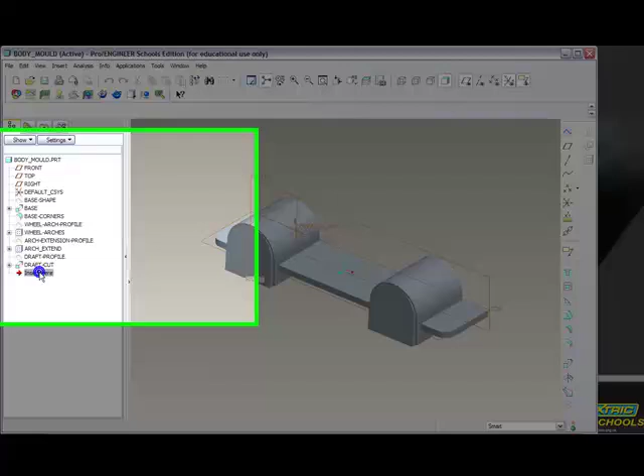Now load up body_mould.prt. Same as in the extrude tutorial, move the Insert Here icon up until it reaches the base corners.

Now we're going to create some new datum planes, so select the Create Datum Plane tool and highlight the back end of the base part. You'll notice we can move this backwards and forwards. Move this into the model by 2 mm and accept.

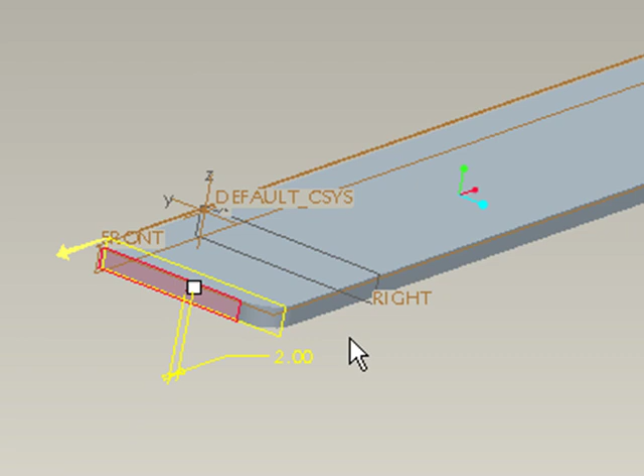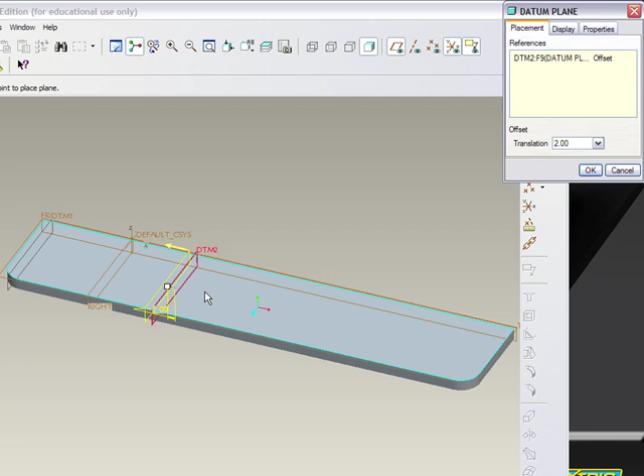Now, without clicking anything else, create a new datum plane and drag this until it reaches 40. Click OK. Now we're going to make another one, drag this by another 40. And one last one - put it on the other end of our base part, inset by another 2 mm.

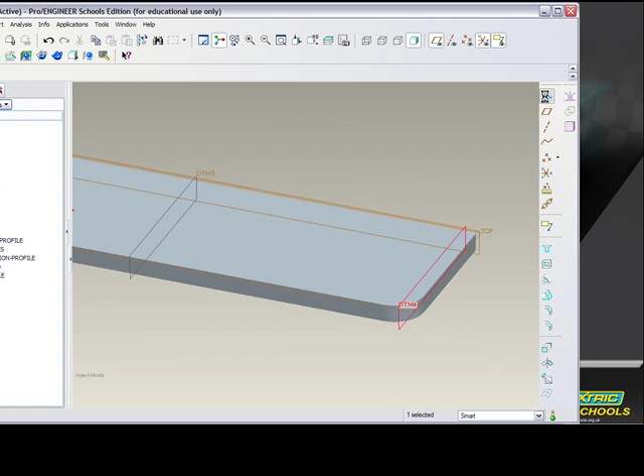Without clicking anything else, hit the sketch button so we can start sketching on the last datum plane we created. Using the line tool, click where I click. Make sure this line is horizontal.

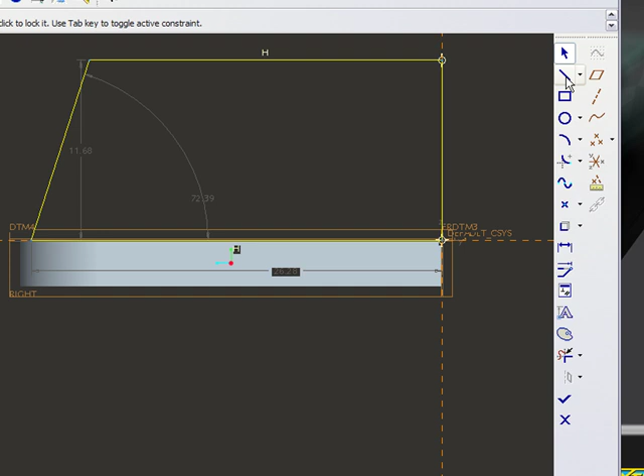Now middle click, hit the selection tool, and now hit the measurement tool. We want to make a measurement from this point here to the edge of our model. Select both of those and then middle click to place the dimension.

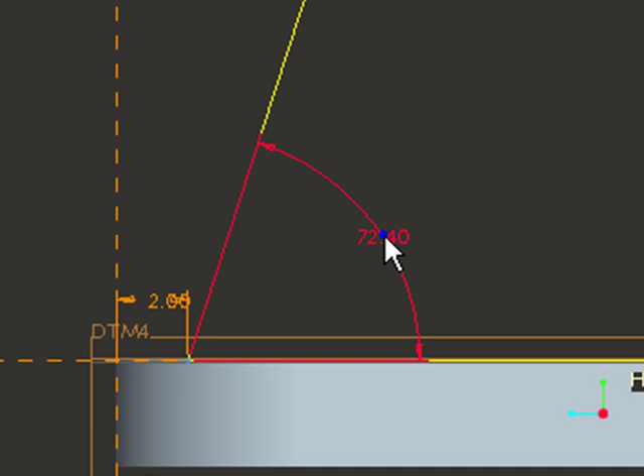Now we want to place a measurement from here and here to create an angle. Hit the selection tool and now we can start editing these measurements. We want this one to be 2 and we want this one to be 80 degrees. Now the last measurement - we want to change this to 20.

Now accept our sketch. Now we're going to make a new sketch on datum plane 3, so highlight datum plane 3, hit sketch,

and sketch again. Now we're going to use a thing called the Use tool, so select it from the tray, select Loop from the dialog box, and now we can pick any edge and it'll copy all the data of the previous sketch that we just drew, except the sketch. Now you should see that the sketch we drew on the first datum plane has been copied onto the new datum plane.

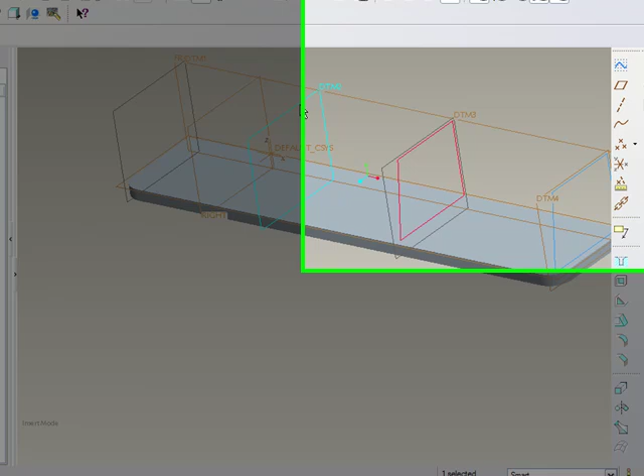Now on datum plane 2, we want to create a new sketch, and using the line tool, again click where I click. Now middle click.

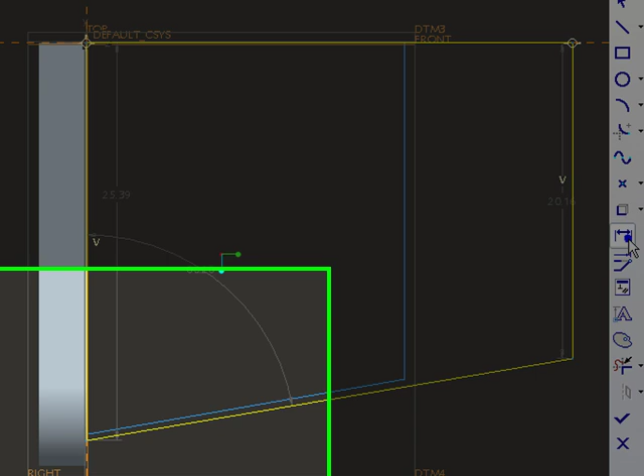Now we want to add our own measurements in, so we'll go to the measurement tool, select this point here, and this line, and middle click, and this line and the base line, and middle click.

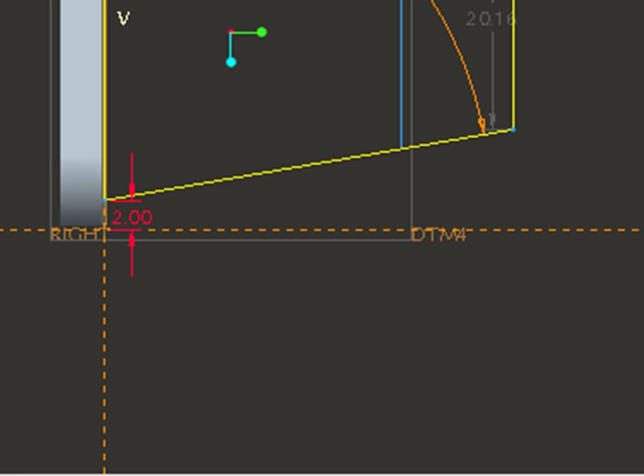Now we want to change these angles to 80, and this measurement to 2 mm. We also just want to create one more dimension along the height of our sketch, and make this 30. Now accept the sketch.

Now we want to copy this sketch again onto the next datum plane. So create a new sketch on datum plane 2. Hit the copy tool again, hit loop, and now select the last drawing that you just sketched and hit accept.

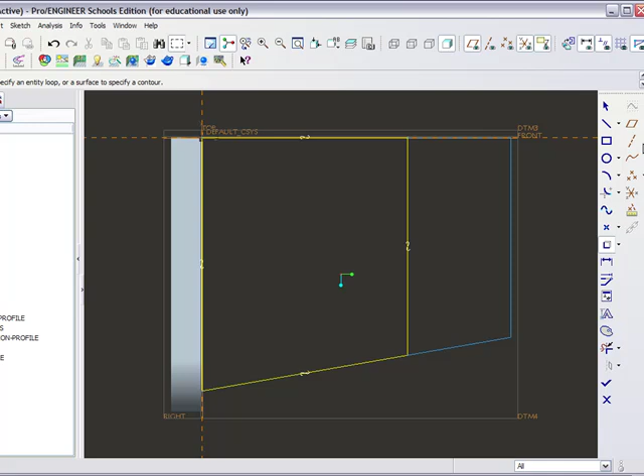Finally, on the last datum plane, we want to create a new sketch and we just want to copy the first 2 sketches again. So hit the copy tool, loop, and then select the line. And hit OK.

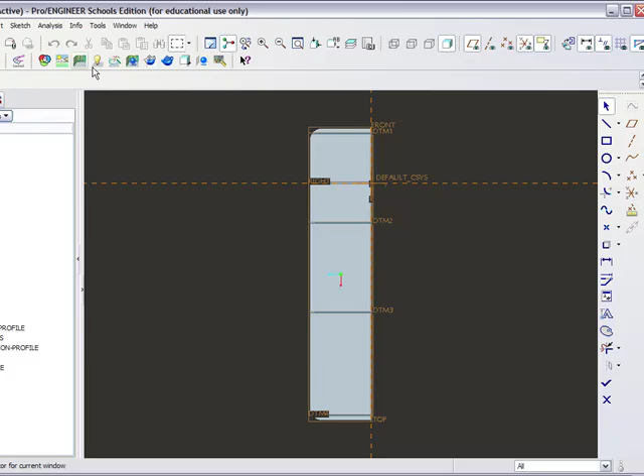Now, to create a swept blend, we need to make a trajectory. To do this, we need to create a sketch on the top of our base part. We need to make some sketch references, so go to Sketch, then References. Let's select these 2 lines, datum plane 1 and datum plane 4, hit the solve button, now hit close.

I want to create a line going from these two datum planes, along the top datum plane as a reference. Middle click, and accept the sketch.

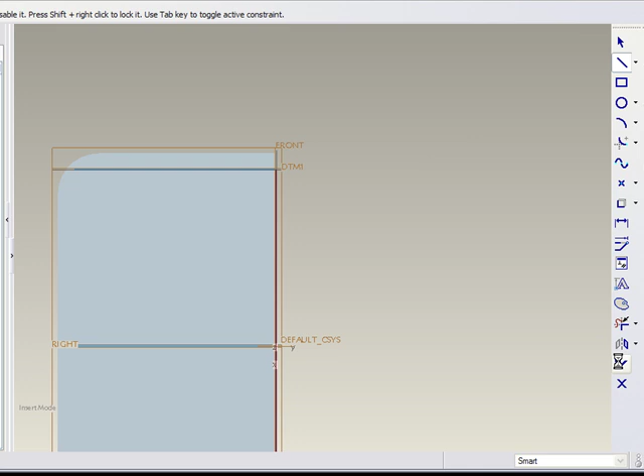Now we want to make our swept blend. So without unselecting the sketch, go to Insert, and then Swept Blend. If you have accidentally unhighlighted the line, just select it again.

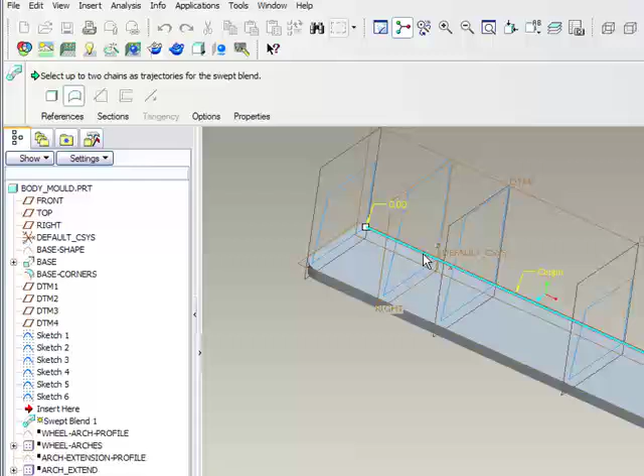Now, we want to go to Sections, we want selected sections, so make sure that's checked, and then select our first sketch. Select Insert, select the second sketch. We want to do this on every single sketch in our swept blend.

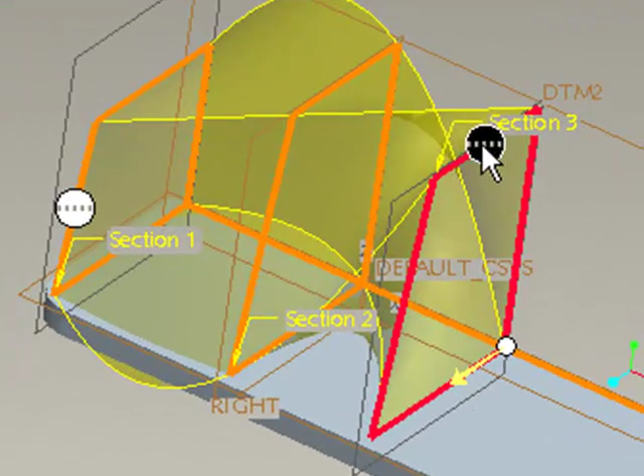What you may notice is that sometimes our swept blend gets confused. All we need to do is tell the swept blend where the start of our sketch is every time. So just drag the handle up to the right hand corner, and the same again for this one.

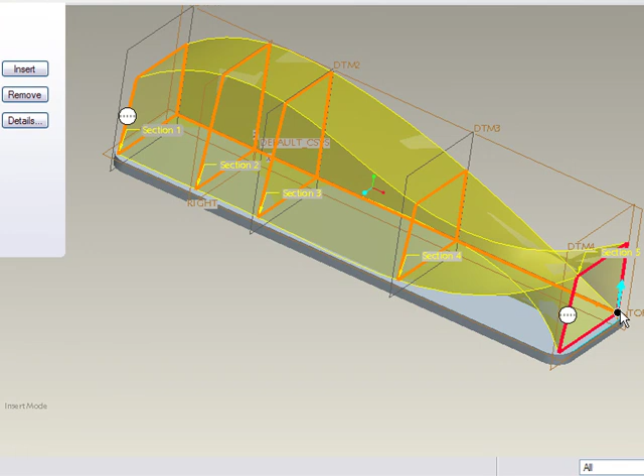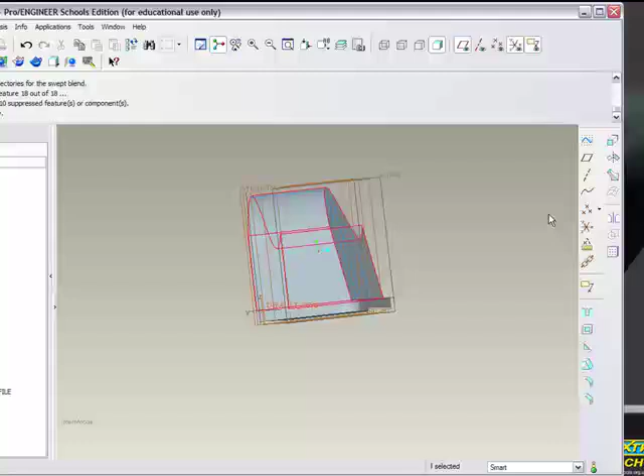Once your swept blend is complete, accept. Now what you'll notice here is that our swept blend is hollow - it has no thickness. So what we want to do is right click on the swept blend in the model tree and edit the definition. Change it to a solid and then accept. Now you should have a solid mould.

Okay, so at the minute we've got a car but it's looking pretty ugly. So what we're going to do is add a round onto the front. If we select this edge here and bring this down, this makes a nice curved bonnet for the front of our car.

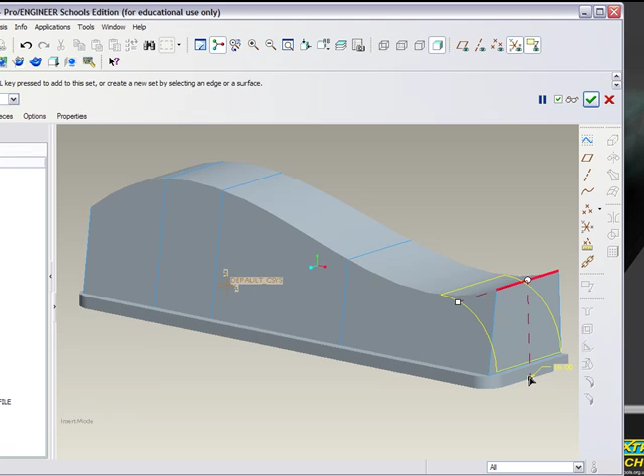We're going to do the same for the back of the car, just to smooth it all off. It doesn't really matter too much about the dimensions, just so long as it looks right.

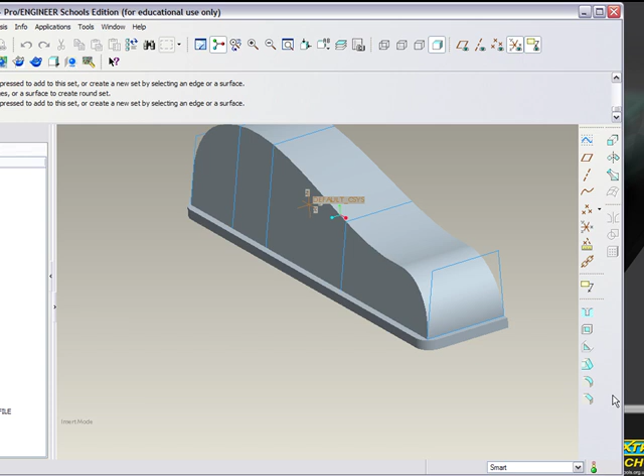Okay, now we want to have a round going all the way around the side of the car. This just takes off that nasty edge. It's about 2mm.

Okay, so now we just need to get our wheel arches back in. So if we drag the Insert Here icon down to the bottom, this will regenerate all the parts before, and you'll see that we've got our wheels back.

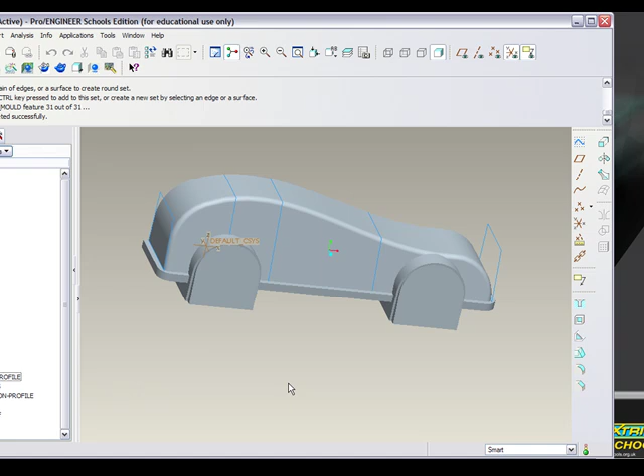Okay, so these don't fit in very well. So what we want to do is add another round, one here, and another one here. Again, don't worry too much about how big these rounds are, just as long as they're not too big that it makes the model fail.

Okay, so now we need to mirror the car. So select Body Mold from the model tree, and then select the Mirror tool from the tray. We also want to view all the datum planes. Select that, and then all we have to do is select which datum plane we want to mirror on, and then hit OK. And now we've got a complete car.